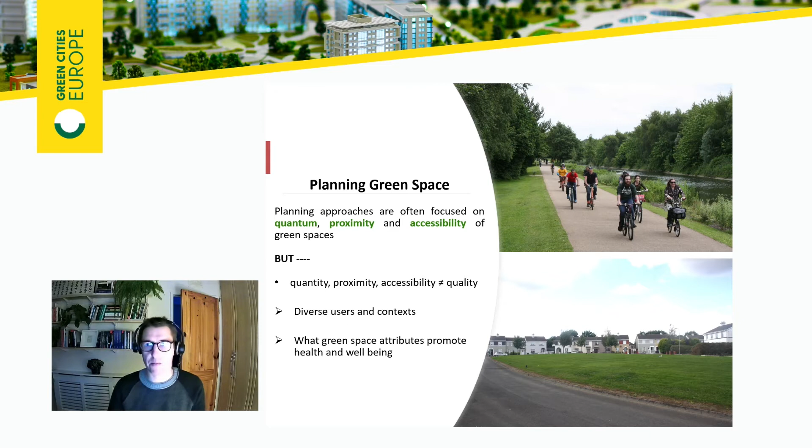So let me take you through one of the case studies, and many of the case studies that we looked at as part of our project. This is of an area just outside the city of Waterford in the southeast of Ireland. It's an economically deprived area.

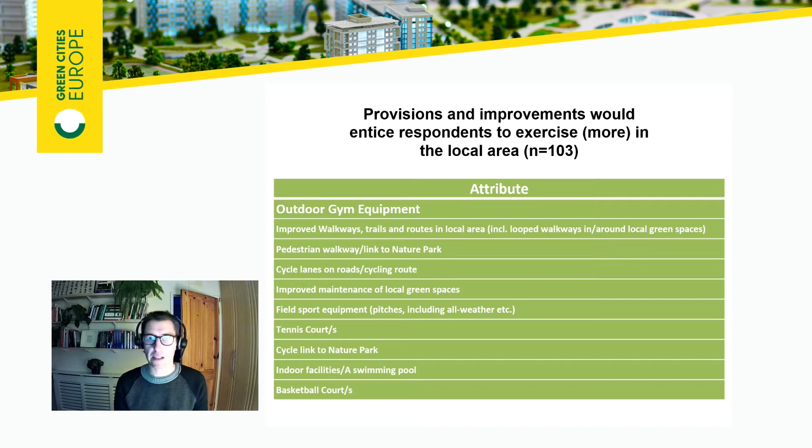However, having reviewed the literature in some depth and looked across the various scientific journals, we became somewhat suspicious of what we were receiving back at the doorstep. Namely, that we felt people were giving us answers they had not necessarily reflected on deeply, and were presenting potential interventions that they thought the municipal council would actually implement in their area, as opposed to what they might necessarily want. So we felt it necessary to match up this quantitative study with a qualitative study.

So how did we do this? Well, we triangulated 3 different processes, one of them being a card sort, which is kind of a choice experiment. I'll take us through these in a moment. A scenario selection process, and an aerial photo sticky process. It's all quite engaged, quite messy, but it elicited interesting narratives and a different perspective on how people actually engage and perceive their spaces. So the first of these was a card sort exercise.

The thing to take away from this particular process is what this allowed us to do was engage with people in a reflective process in order to elicit a greater understanding of what they saw or perceived as enticing them to use this area, rather than just giving us stock answers such as gym equipment or more playing pitches. We actually got into an understanding of how they actually use the area, would like to use the area, their desires, their needs.

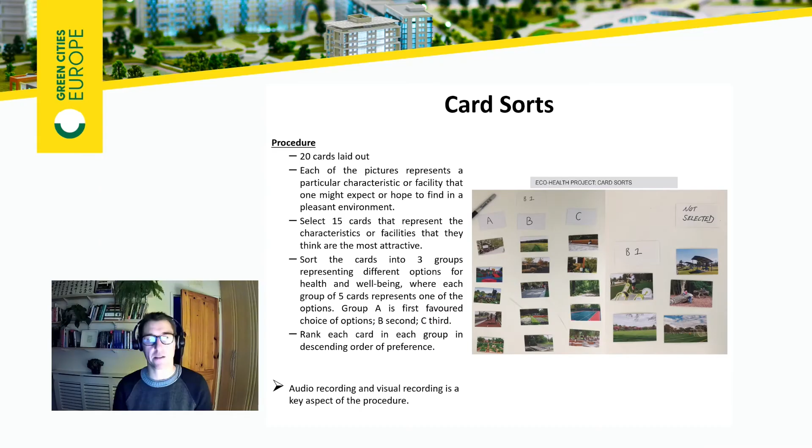The respondents were asked to select 3 cards from the 15 cards in those columns we saw a moment ago, A, B, and C — cards that they felt would make the area more attractive as a place to spend time and entice them into the area. These 3 cards were placed on the aerial photo where the respondent thought they could make the greatest impact, essentially spatializing the attributes that resonated best with them to get a geography of where we could intervene in space for maximum benefit.

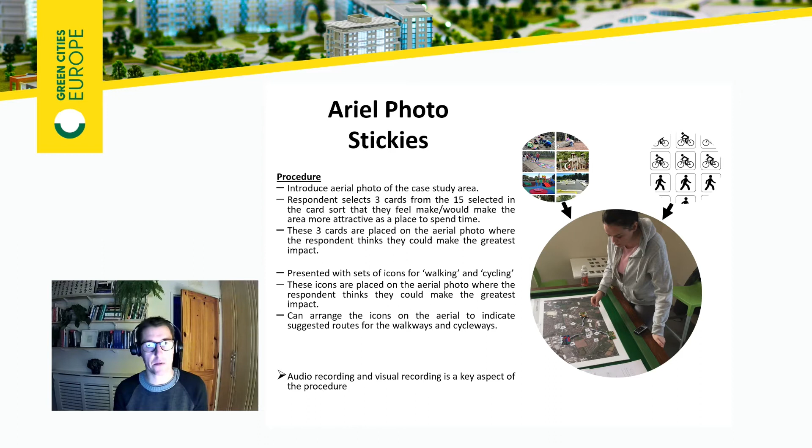Respondents were then presented with a series of icons for walking and cycling, shown in the top right there. These icons were placed on the aerial photo where respondents thought they could make the greatest impact, arranging them to indicate suggested routes for walking and cycling. Again, we talked through and recorded the discussion as the respondent explained why they chose different attributes, where they placed them, and how they spaced the walking and cycling routes.

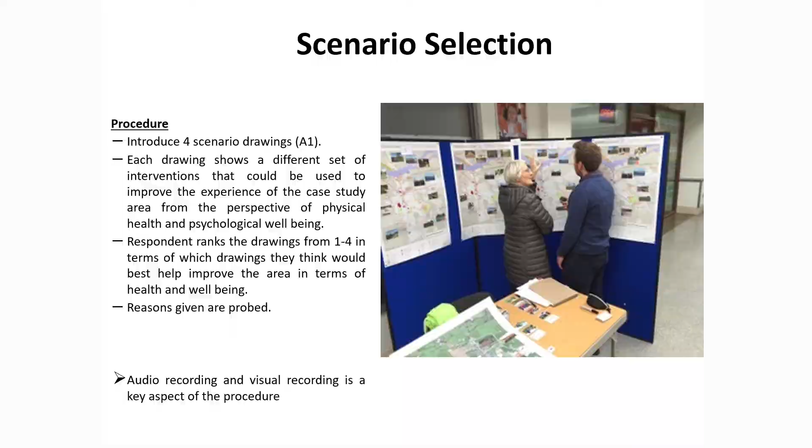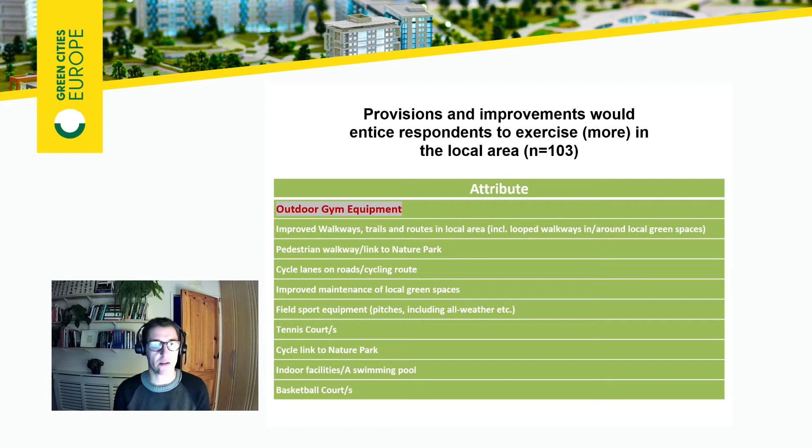This is where it gets interesting, bringing us back to my earlier slides. Recall we asked interviewees on the doorstep survey what provisions and improvements would entice them to exercise more in the local area. Out of 103 households, by a factor of 3, outdoor gym equipment was listed as number 1. Below that, walkways, and below that, playing pitches, all-weather pitches, field sports equipment, tennis courts, and so on.

But when we actually used this qualitative approach, we realized that the things not selected were actually the interventions the survey suggested people would want. They said in the survey they'd want outdoor gym equipment, enhanced playing pitches, tennis courts, and so on, but when they went through this qualitative narrative discussion approach, we realized that was not what they wanted.

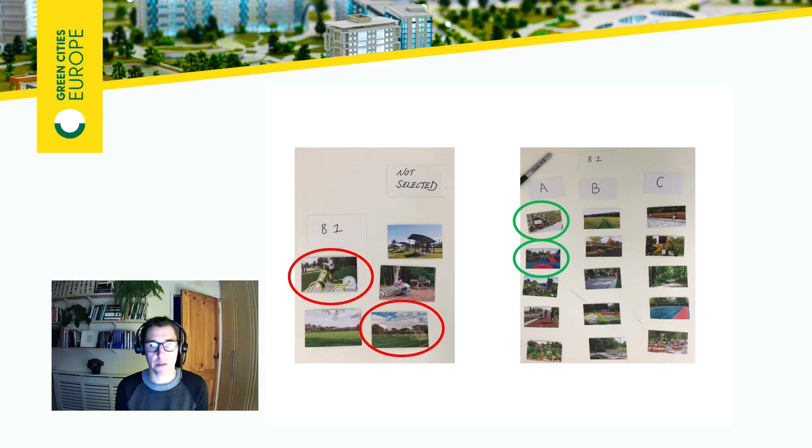What they actually wanted was interventions such as a place to meet people, cafes co-located with play areas, and opportunities to engage with nature and with people. Reflecting on this and asking why, it brings us back to the pub that had burnt down, which had been the beating heart of the community. Since it burnt down and wasn't replaced, community members felt the sense of community had dissolved and dissipated. What they sought was somewhere to meet people, a destination to entice them to use green spaces co-located with opportunities to engage with nature and places to mind their children — a space to walk to, sit down, bring your dog, bring your kids, to meet.

So what does this tell us? It tells us that planning for health and well-being means changing thinking from spatial development to human development — moving the dial, taking green space planning and design beyond an over-reliance on old tropes of context-detached assumptions, such as putting down outdoor exercise machinery to resolve health and well-being issues. It tells us to move beyond simple proximity standards like accessible natural green space standards, which are useful in themselves but don't necessarily respond to quality or to users' needs and desires.

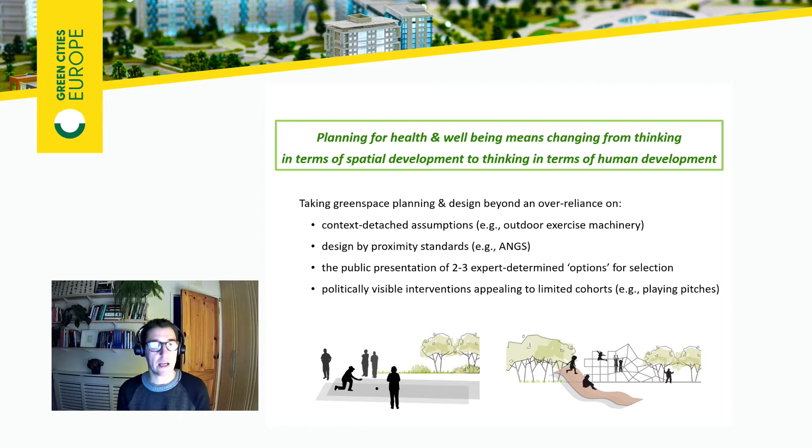It tells us to move beyond public presentation of 2 to 3 expert-determined options for selection — drawings that experts or consultancies bring forward without engaging with people in advance. And to move beyond politically visible interventions that appeal to a limited cohort, such as playing pitches, which often only appeal to 20 to 35-year-olds and exclude young children, families, the elderly, and so on.

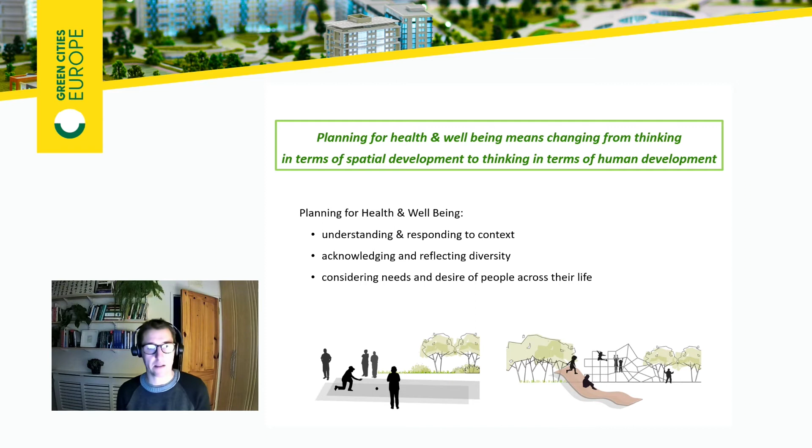So what we need to do is think of planning for health and well-being in terms of human development, understanding and responding to context, like the pub example I mentioned. It's not about provisioning outdoor exercise machinery that the community felt would be vandalized and further blight the landscape, but rather providing somewhere for them to go. It's about acknowledging and reflecting diversity, and considering the needs and desires of people across the life course—young pregnant mothers, young families, middle-aged, the elderly, all that diversity.

Thank you for listening. If you're interested in this kind of approach, we have published widely on it, including a project report, available at this website, ecohealth.ie. Thank you very much, honored to be here.

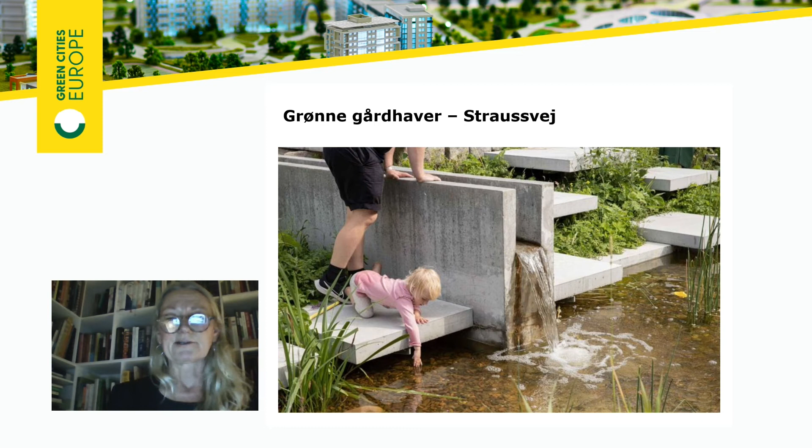The water and the nature is something that we can feel and touch and smell. So why do cities need nature? Because we now want to live in cities again. Therefore we need to have nature in the yards.

In 1996, there was a neighborhood improvement movement in Copenhagen. It's a program half paid by the state, half paid by the city, where you can go on locally. It's a 5-year program. The decisions are taken locally between people living there and people knowing something about city development in the administration. They have a small amount of money where they can go and change places, just temporarily like this, but it creates a human scale.

All those processes we have been doing by neighborhood improvement engage people. These are free places where people can go on Facebook and say, I want to take care of this place. A lot of initiatives in those neighborhood improvements start to grow out locally from people, together with people knowing something about it and the local neighborhood in general. Almost every process we have in those neighborhood improvements has in common that they talk about nature and that they create nature in the city.

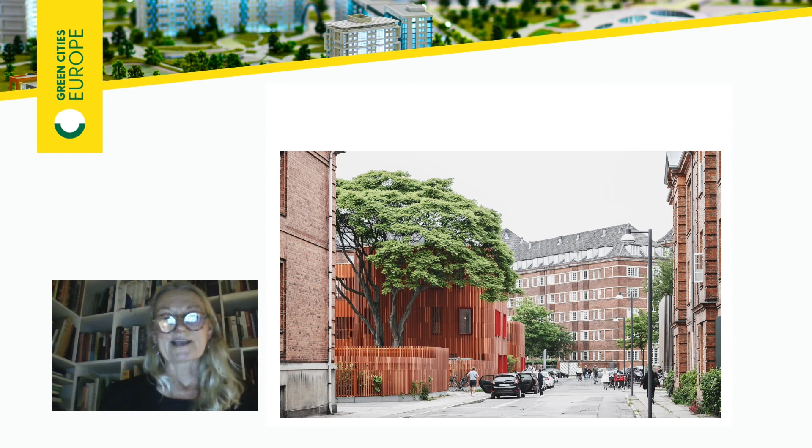This is an example of a new kindergarten in Copenhagen, a beautiful design building. And the reason I put it here is that the contrast between that tree and that building creates the whole atmosphere, and that is good architecture in this case. This building was nothing without this tree. So one of my issues here is to say that...

Now my church bell is ringing. I don't know if you can hear that. If you can, I'm sorry, but I can't stop them.

This example is also to show that the combination and the balance between the built, controlled construction and the nature, the wildness, the uncontrolled, the irrational, is something that actually makes each other beautiful.

Nature creates a balance between the rational and the irrational, which is very important in our new modern world. Last century it was all about rationality. In this century we need to keep the balance, and we need to get the irrational back into our rational understanding, because we need both. Nature in cities is part of creating that balance between the rational world, the controlled buildings, the controlled constructions, and then the irrational landscape that we cannot control even though we design it.

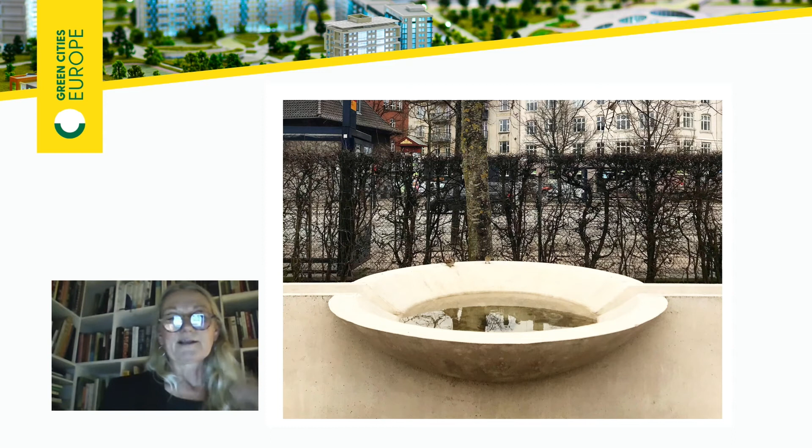A lot of projects are now being developed, always taking care of the water on the ground, using it as something people can play with, that attracts birds like here, opening up for more biodiversity, turning gray spaces into green spaces, inviting nature back into the city, so that we hopefully can create a world where we can survive just a little bit better. Hopefully, we need it.

So that was 5 reasons why we need nature in the city.

My hope is that all European cities listening start to discuss how we can be aware of educating more landscape architects, inviting them into the big discussion in society, inviting them in when we design every building, and put money into the budget for it, not taking away that money by the end of the day because the budget is used for the building and we didn't have more money left for the landscape.